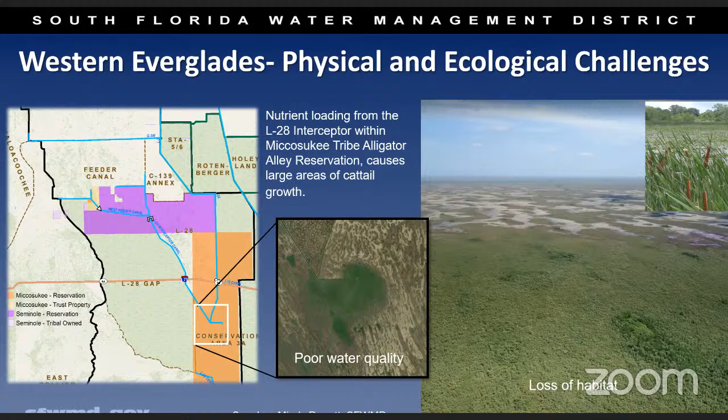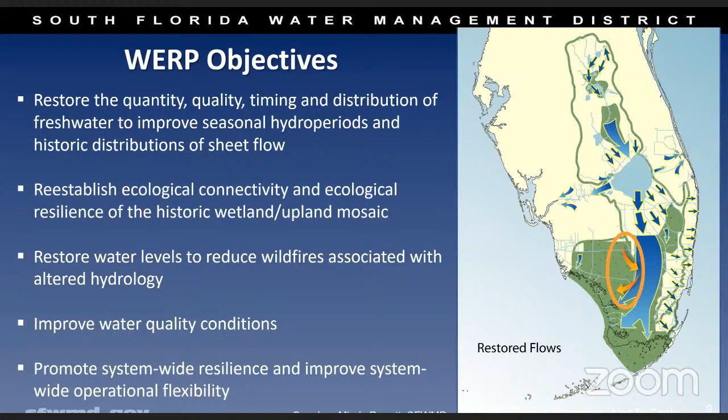WERP's objectives are to address some of these challenges and restore the quality, quantity, timing, and distribution of water. On the right, I've altered this photo a bit to increase the contrast, but you can see where the sloughs naturally flow and how some of these features are blocking that natural flow, outlined by the vegetation.

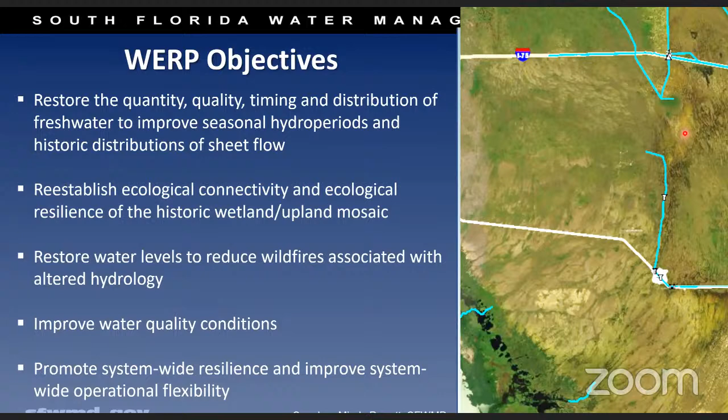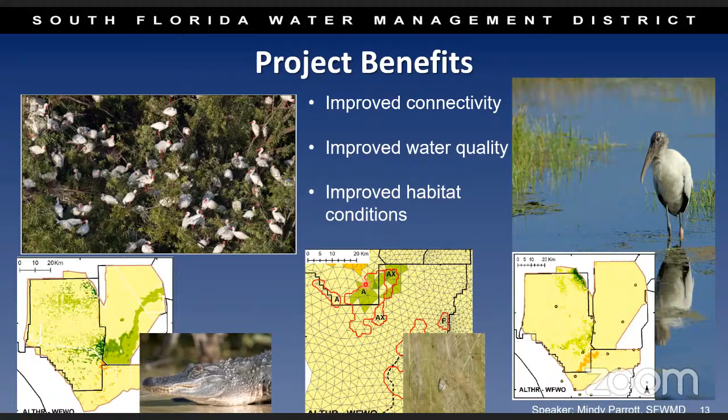So with all of these benefits, we have to also look at what those changes do to the built environment. All CERP projects have to comply with the savings clause. In short, that means the CERP project can't cause a reduction in level of service for flood protection in existence at the date of enactment. It also addresses water supply.

But the project can incorporate mitigative measures to address flood protection, which might be additional features like the additional culverts that were added to Loop Road and Tamiami Trail. We might look at flowage easements where we need to flow water over private lands. There might be a need for raising structures or other measures.

So this requires a technical comparison of predicted water levels with existing water levels and elevations of structures and topography. And so last year, what we did was we looked at the areas of the largest changes in groundwater or surface water, and we came up with these 4 zones.

And that is where the district surveyed parcels. So Michael O'Brien will go into a little bit more about that activity, but I wanted you to know why we looked in certain areas and how that was decided.

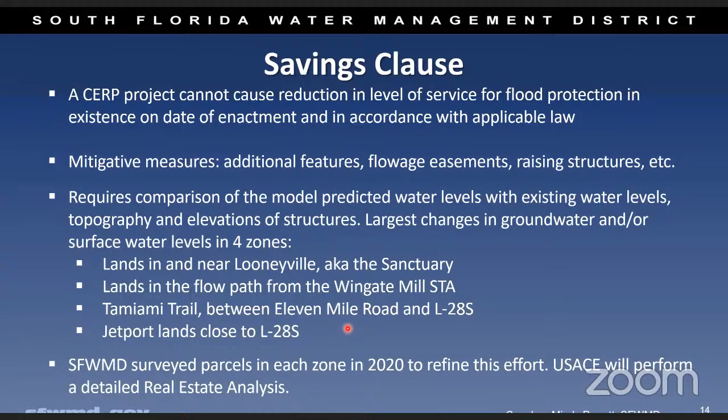So with that, I will take questions if we have some that need to be answered.

Hi Mindy. Hi, there's just one unanswered question at the moment from Frank Carrieri, asking how many people are on the call who are landowners. I don't know that we can determine that from the list we have, but that's the question. Okay, I think all we can do is, I think you can see the list of attendees. Is that correct, Devon? But other than how they chose to identify themselves when they logged on, I don't think we have any way to tell you how many on the call are landowners.

So I apologize, Frank, but I don't think we can answer that question. All right, then there was - I think Jen Leeds is trying to address that issue, that individuals are not able to see the participant list, and I think she's directed a question to Devon on that to try to correct it. Okay, so hopefully that'll be addressed shortly.

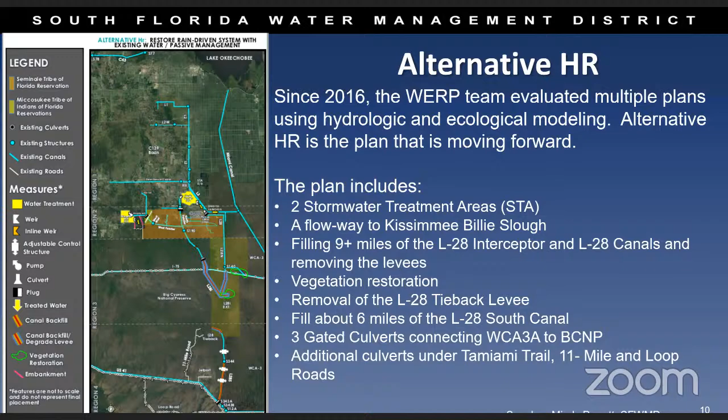All right, thank you for your question. Let me go back up. Apologize here, there we go. So I believe the Bear Island area is pretty far west as well. So I can't say for sure without exactly the location that you're thinking of.

Are there any additional questions, Jennifer? I think that is it. I do have a response from Devon on the participant and attendees list. He was double checking with Zoom to see if it's something that we can provide. It appears that we can only have it for the panelists right now, but he is going to look into that.

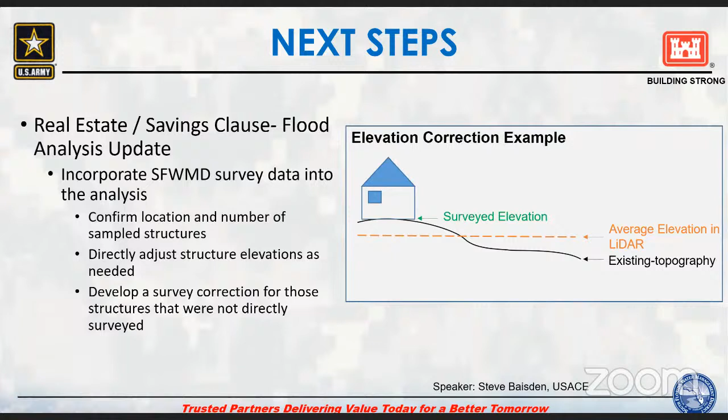So I know that's kind of a lot. Let's see, the next slide, I think, is just questions. Is that correct? Yes, it is. Okay.

Flowage easements would only be requested in the event that projects or parcels and structures are impacted. If there's not any impact to the structure, then we will not be pursuing any flowage easements on those parcels. I did see a lot of questions roll through, so let's start taking the questions.

We don't have any additional new questions that have come through yet, so we'll give it a minute.

Once we complete the real estate analysis, in approximately 3 to 4 months, we will be presenting that information to everyone, to the sponsor, to the stakeholders, and certainly to all of the Gladesmen and landowners out there. Hopefully by that time we will be able to meet in person to share this information with you.

Thank you, I've got a couple of new questions. The first one is from Jeff W: what exactly is a flowage easement?

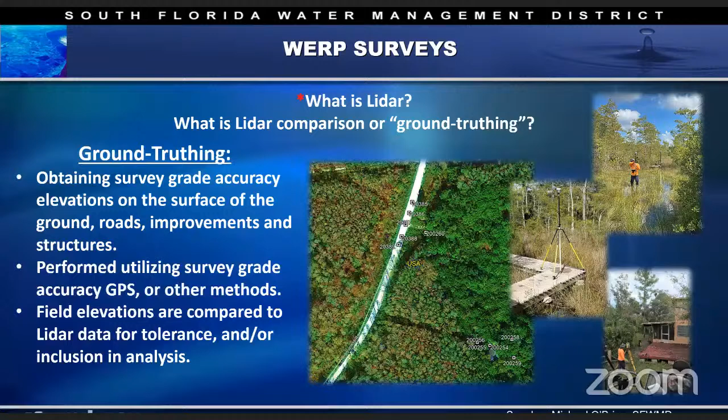There are some slides and pictures on the right showing how we collected data points throughout the roads and homes and in the woods, and pictures representing the environment surveyors were working in. This was unique; it was wet in a lot of areas and quite challenging in some areas.

Phase one, the north portion, north of I-75, including Looneyville, also known as the sanctuary. Phase one conditions were rural lands.

There was a combination and mixture of camps, residents, and improved properties. Some dense trees, canopy, and vegetation caused a lot of problems with GPS. We also had to work with occupied and non-occupied private property, with a lot of concern for privacy and secured entry considerations to properties.

We worked quite a bit with agencies, the public, and associations out there to gain access, permissions, and coordination to these properties.

There was a lot of public notice requirements. We had mailings, signs on the roads, email blasts from media agencies to contact owners, get approval, and then organize meetings on-site at the gate to gain access.

Phase one's mission was successfully accomplished over a course of 60 days, directly benefiting from the assistance of the Big Cypress National Preserve, the homeowners associations, and the private landowners and residents.

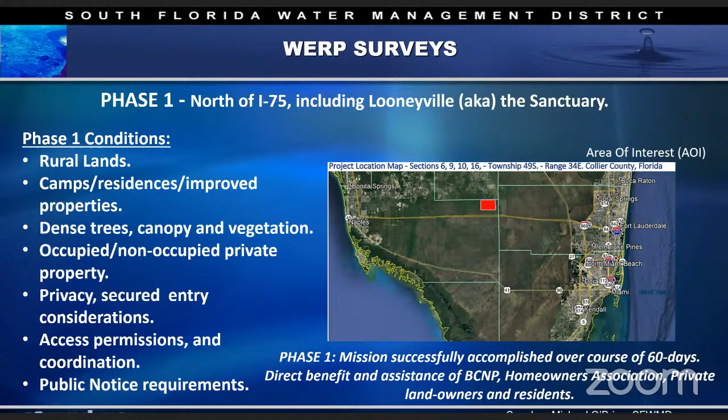Next is phase two, the southern area, with phase one continuing; we'll get a little more detail. Phase one, we obtained well over 1,700 elevations.

We obtained elevations on a variety of improvements, structures, and natural ground. We had minimal owner and resident concerns thanks to great coordination. We completed reports in August of last year, with some pictures representing data points and survey points we obtained throughout the area at specific sites.

Some got into pretty great detail: finished floors, grounds, stairs, improvements, outhouses, any kind of improvement out there that may need analysis in comparison to the LiDAR.

We also went down to chicken coops and animal quarters, so we got quite a bit of detail out there on purpose, not to avoid or misrepresent the parcels we were challenged to acquire.

We did have some challenges with access and privacy for people, and also some wildlife challenges. A unique picture there shows a bear encounter; surveyors had to evacuate the area.

I think there was some food in that backpack, and the bear actually knocked over and damaged equipment. That was, can't say interesting, but to be expected in that area.

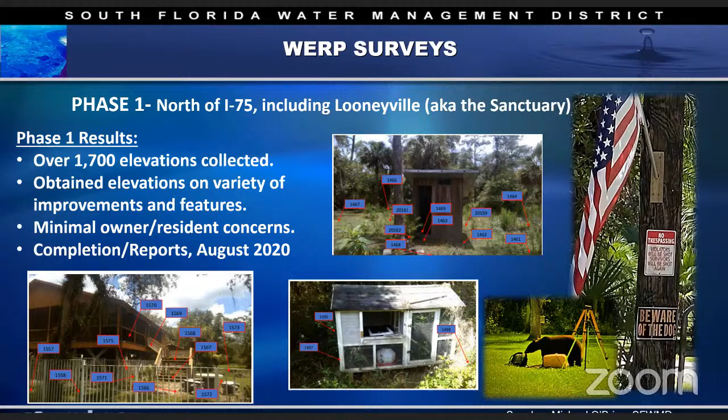Okay, Melinda, we go to phase two. Phase two is the southern portion, the Jetport camps in the Tamiami Trail corridor. There was residential and rural lands, and also tribal lands and residents incorporated into this project. There were tribal environmentally sensitive areas we had to be concerned about and aware of, and private hunting camps in the Big Cypress National Preserve.

Most of this area was swamp and overflowed lands, with dense trees, canopy, and vegetation, and included occupied and non-occupied private property. There were also considerations for privacy and secured entry, meeting residents and camp owners to gain their permission and coordination to access the properties. This phase also had numerous public notice requirements, letters, email blasts, and so forth with the public and tribe.

Phase two's mission was successfully accomplished over the course of 90 days or more, with direct benefit and assistance from the Seminole and Miccosukee tribes, Florida Fish and Wildlife staff, and the Jetport Conservation and Recreation Club members, who really had hands-on involvement in completing this phase.

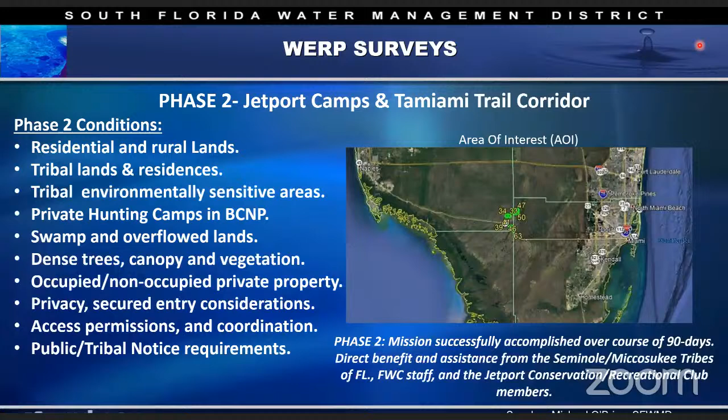Next, details on phase two, the Jetports and Tamiami Trail corridor. This number is actually quite low - it's probably more up to 5,000 elevations collected in this area, attaining elevations of a variety of improvements and features.

We had great successful tribe and hunting camp stakeholder coordination, and ended up with minimal owner and resident concerns. Florida Fish and Wildlife and Jetport Conservation Recreational Club members assisted for many weeks out there, providing swamp buggies and collaborating with staff and members in escorting us out to the camps. That was wonderful collaboration between the Conservation Club and Florida Fish and Wildlife.

The result of this project was the completion of reports provided to the team in October of last year. On the right, some representative sites are shown with dots on maps where we got elevations. There were many more camps out there north of the Miami Jetport, and along Tamiami Trail. We had to work on a selected group of residences due to time constraints and mostly budget constraints, to get a best representation for the real estate analysis group and the team.

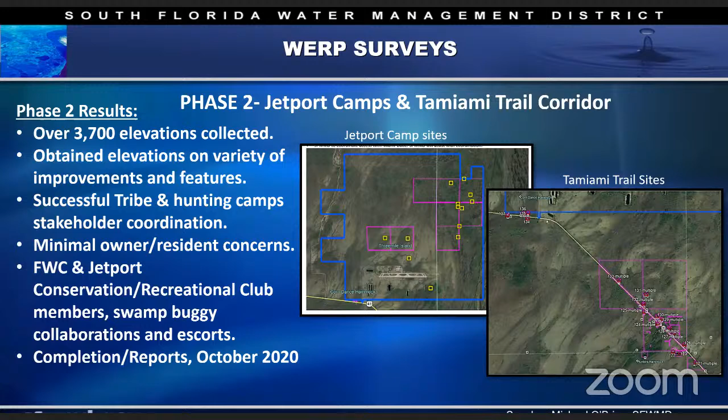To our survey group, it was quite challenging. We had several buggies that helped us out there, and without that effort from Fish and Wildlife and the conservation group and the district, we wouldn't have gained access. One thing I learned is going out there blind without an escort, we probably would have gotten lost quite a bit too. So that was really great, the group helping us gain access to those camps.

Okay, you can go to the next one. This is coming to the final slide. There's a video coming up here of our drone imagery of the camps. You may have to adjust your volume, please.

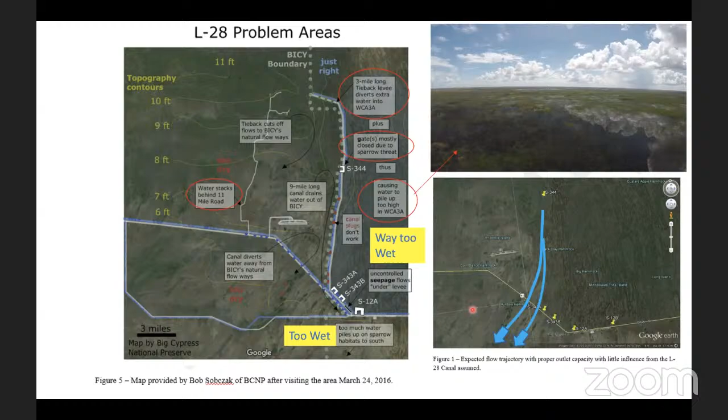So what we were asked to look at essentially is what it would take to go ahead and design and construct these 3 culverts that were mentioned earlier. Those 3 culverts are proposed in the existing L28 South levee - yes, the levee is staying - and they are such that there's 1 north of S344 and 2 are south of S344. Once we put them in, you're looking at a design flow of 1,000 CFS. Just to be clear, the 1,000 CFS is a design number - it doesn't mean they're always passing 1,000 CFS, but they were to be sized to handle 1,000 CFS.

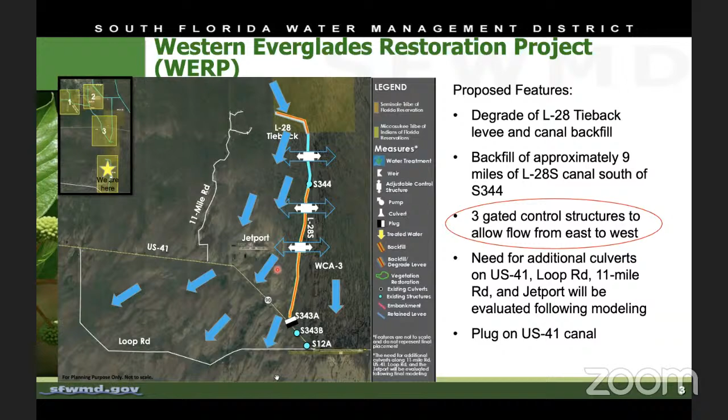So once you put them in, obviously you're bringing a lot more water into this pocket area. What does that mean for the downstream interests, particularly some of the potential flow impediments, meaning US 41 and Loop Road? What changes do we need to make there? What kind of culvert do we need to install and what size? So that's kind of what we were looking at - just assessing what it would take to put in those 3 culverts as a first step of this Western Everglades Restoration Project.

To that effect, we did a field reconnaissance trip earlier this year to Loop Road, essentially going from S12A, driving all along Loop Road, making our way through this loop, and coming back to Tamiami Trail. On another day, we also looked at 11 Mile Road. The intent of that work was really to assess the existing culverts - how many do we have out there, what shape are they in, do we need to survey them, what do we need to do with them as far as any future analysis that will help us understand the impact of adding these 3 culverts. We brought in a stream gauging group.

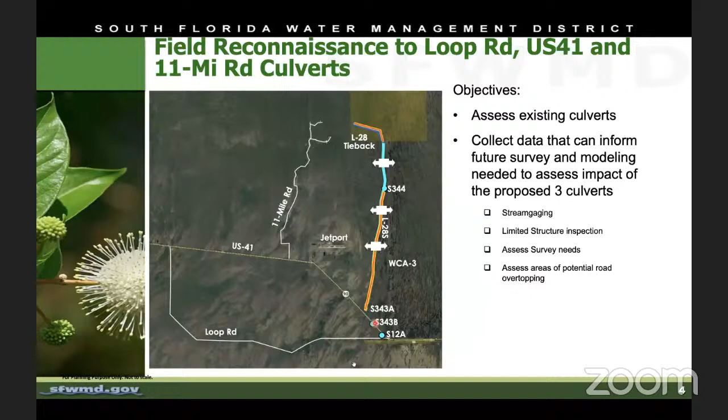Stream gauging essentially is to measure flows, get an actual measurement of how much water those structures are moving. We did some structure inspection as well. We assessed survey need, and we assessed some area of potential road overtopping. I'll summarize that in the next few slides.

For road overtopping, again, this was early January this year. We saw some overtopping near Loop Road itself, east and west of that Loop 1 structure. We didn't see any overtopping at Loop 2, but we do know from data analysis there are times where Loop 2 will overtop.

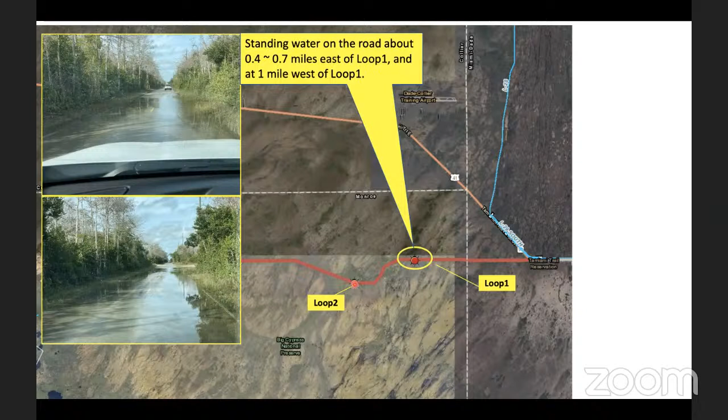We went ahead and measured flow at about 4 or 5 of the major passages for flow. These are just some pictures of that work. What that entails essentially is you have an acoustic device mounted on a small tether boat, and it's measuring how fast the water is moving. From that, we are able to get an estimate of how much flow those culverts are passing.

Granted, this was dry season, we're getting flows really small, 20 to 40 CFS range. I think the highest we measured was about 44 CFS or so. What that tells us is these culverts, even though we saw many of them out there, don't really have a whole lot of capacity, meaning when we have high discharges, high rainfall, we're going to have to increase the capacity through those roads.

Otherwise, we're going to have even more overtopping than we have today. The other issue we saw is there is really very limited head across the culvert, meaning the water level in front of the culvert and behind it are very close to each other. When you have that, you almost have one big pool of water and you don't have a whole lot of flow going through them.

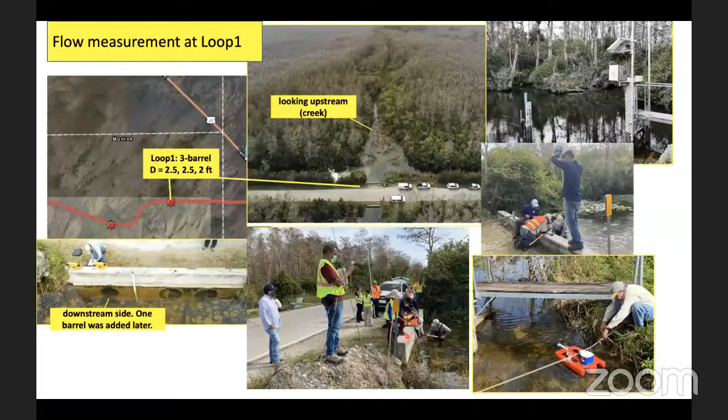We also went to 11 Mile Road. This is the road going up to an oil rig at this location. Sobczak from Big Cypress took us around and showed us. It was really helpful. Thank you, Bob, for doing that.

We were able to see that this road had about 125 culverts ranging in size from 12 to 24 inches. A big chunk of them are in really bad shape, old and failing. 16% of them are relatively new. I have a picture of some of those newer ones. In size, they range from 18 to 24 inches.

The other thing we saw is how the flow varies depending on where you are on that 11-mile road. The first 8 miles from US 41, the flow is essentially from east to west. Then as you go up, at a certain point it shifts and goes from west to east. We also discussed this with Sobczak and others. There was some overtopping of this first 1 to 2 miles in 2020, suggesting this road has limited conveyance as far as pushing water from the east to the west part of Big Cypress.

We also looked at the degraded tieback levee itself. Even though the whole western tieback levee is going to get degraded, there are portions of it today that are already degraded. Those portions will obviously impact the movement of water as you bring in that water from the north, and you potentially can have an effect on what we're doing with this culvert.

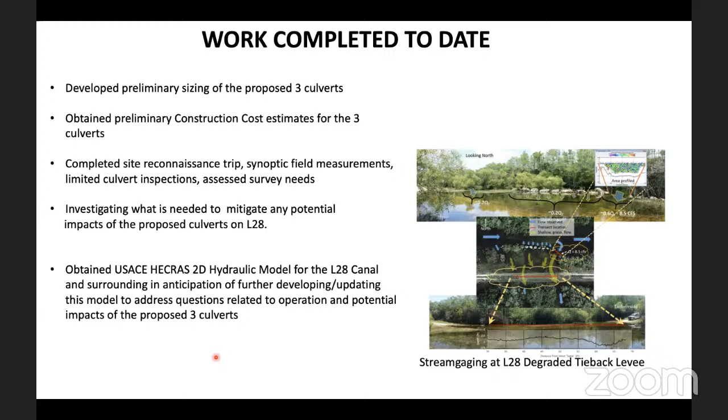That's my presentation. I don't know if you have any questions for me at this time.

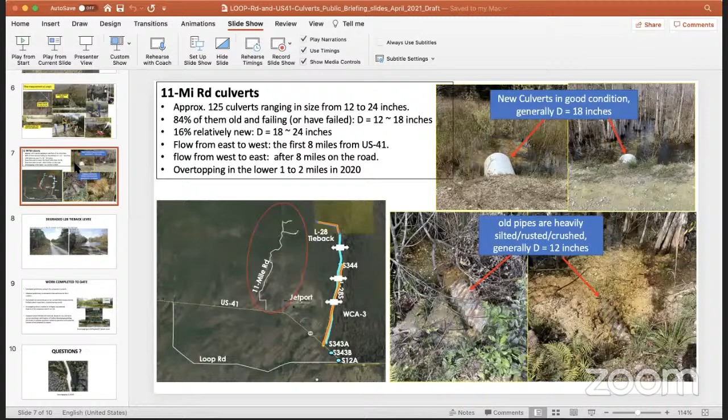Thank you. We have one question that's come through. It says, will the 3 culverts continue to divert water westward even when water levels are dropping in WCA 3A South? Could this possibly lead to more low water closures in 3A North at times like right now when it's very dry and close to hitting the closure criteria? Or will the culverts be at an elevation to only help during high water events in 3A South?

Great question. Thank you for that question. Yeah, this culvert, first of all, they will be sized to move 1,000 CFS total, but they will also be gated. So we'll have the option to modulate the discharges through them.

Obviously, when 3A is low, in all likelihood, they'll be closed. They will have to follow whatever water control plan is in place. Today, we have a COP, so it has to go in line with the water control plan. We're not going to be deviating from that. So if the water levels are low in 3A, obviously we'll be shutting those gates. They will be gated culverts, not just open-ended culverts.

Great question. Okay, and then I have another question from M. Taylor. Have the culverts under US 41 been considered in the WERP investigation? And if so, in what capacity?

Yes, we are looking at the culvert under US 41. Obviously, those are part of a pathway, the flowway if you want to call it, that this water is going to take. We did look at them, and we will be looking at them further, not only surveying them, but also potentially doing the hydraulic analysis as well. Yes, that will be part of the analysis.

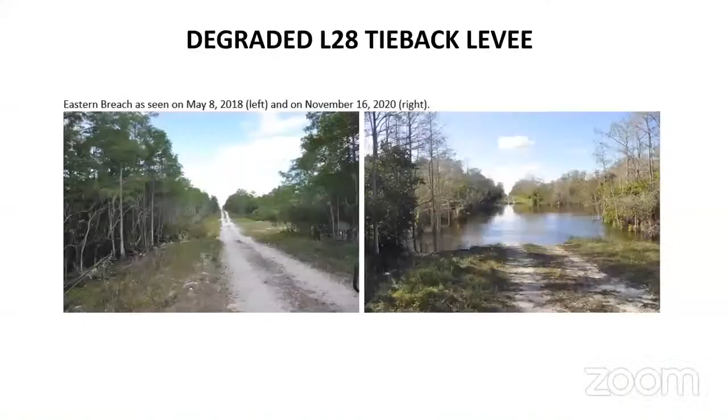So I think something that might help answer that question is, can Matahel go back to the slide he had with the button bush in the background? Is that possible? You let me know when I get there. Okay. Did I miss it? No, I haven't seen it yet. Keep going. No, I don't see it. At any rate, I thought it might help you if you find it.

The L28 South proposal is essentially to remove the levee from the entrance at the Tamiami Trail to where it makes the turn and goes to the north. The proposal is to put 3 structures north of that to regulate water flow from east to west. How do the agencies propose to access those structures for operation and maintenance?

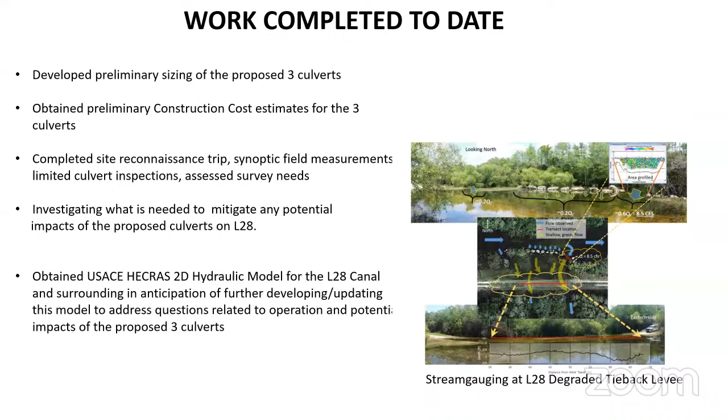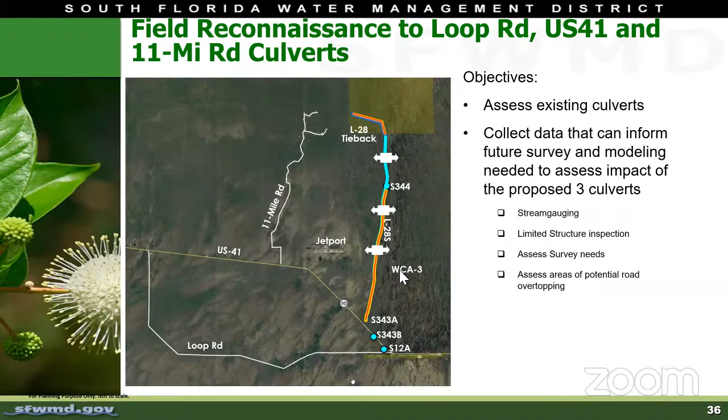Mike, just to clarify, the levee on the L28 South is not going to be removed, only the tieback. That's why I was looking for that slide - if you look at that slide there, it's my second or third slide. Keep going, keep going, there it is. There you go, perfect, that's it. Yep. Nope, there it is. Nope. Is this the right one? Or is it the next one? I think so, okay, that'll work.

But if you zoom in down there at the bottom of the levee, can you do that? Yeah, right there, can you zoom into that? I can try. No, I don't think so.

So from there back to the south and east, there's not going to be a levee, or there is going to be a levee? So whatever levee is there right now will remain. This is a block on the canal, just exaggerated for graphical purposes. So then from there all the way north, the canal and the levee will continue to exist. The canal will be backfilled, the levee will stay.

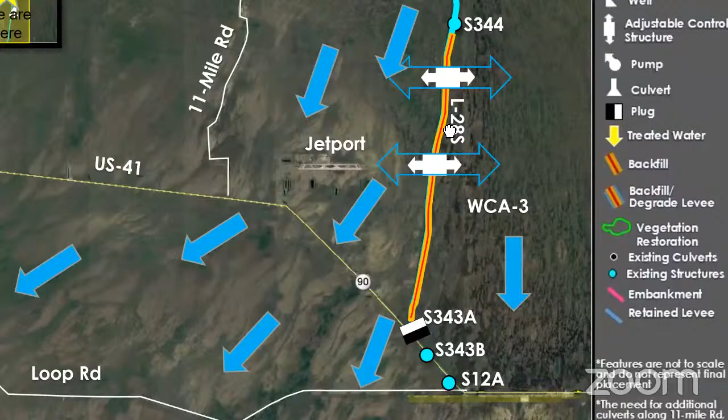Okay, and then when we get back to the tieback, the levee and the canal will no longer exist. But will there still be an earthen trail traversable by a 4-wheel drive vehicle from there to where the tieback currently ends? Yes. And that trail will be accessible by people who traditionally used it to access their camps in that portion of the preserve, correct? Correct, yes. And it wouldn't be impossible as we move forward with planning that where the tieback would be completely removed at the end of the L28 South levee, that an extra piece of dirt might be laid out where someone might be able to turn around or park a couple of vehicles, right? That's not an impossibility.

Not an impossibility, no. That's something we would have to work out as we continue to progress with the planning of this project, right? Right, correct.

So if you zoom out to its original form, I don't think the L28 Interceptor is up there, but for folks who have camps in the Miccosukee area who are traditionally letting their buggies or airboats off at the end of the L28 Interceptor, which is known, I think, as Sand Lake or Sand Point.

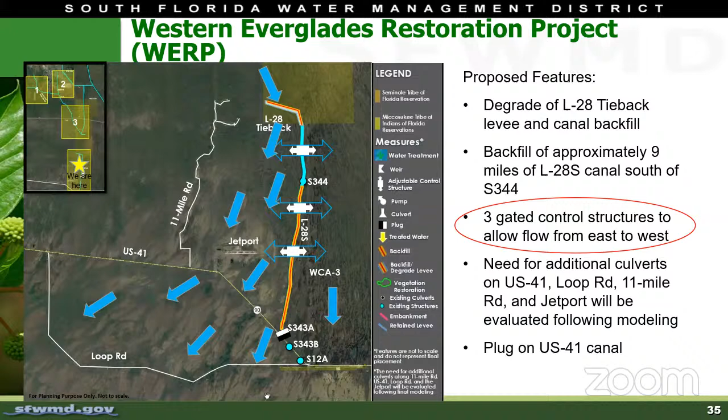Sorry, Mike, I'm not -- so catching I-75, exactly where you are. Well, it's not on that map, but, I guess it is, but it's in the little square to the top left. The L28 Interceptor comes down from 75 on an angle. You're going to degrade the levee and fill the canal, so the L28 Interceptor won't exist.

Yes, correct, right there. But people use the L28 Interceptor to access Miccosukee tribal lands that they lease, their camp leases are on. And some people use that to access Conservation Area 3. So clearly there won't be a road that goes to the terminus of the L28 Interceptor anymore. But can we continue to ensure that there's access from that point at I-75? So while it might be an inconvenience to some to not have the levee there anymore, at least they can continue to offload their airboats and off-road vehicles at the same place they've done so traditionally for the last several decades.

We could certainly look at that. So if we can make sure that that's being worked towards now at inception, and that people can feel comfortable knowing that you guys are addressing that, I think that might alleviate any concerns.

And the same to be said for Looneyville, which I heard was also asked earlier today. I know you said you were looking into it, but just something for consideration. Seems to be a lot of concern from people, and certainly if you guys can address it or let us know that it's being addressed, it would be better.